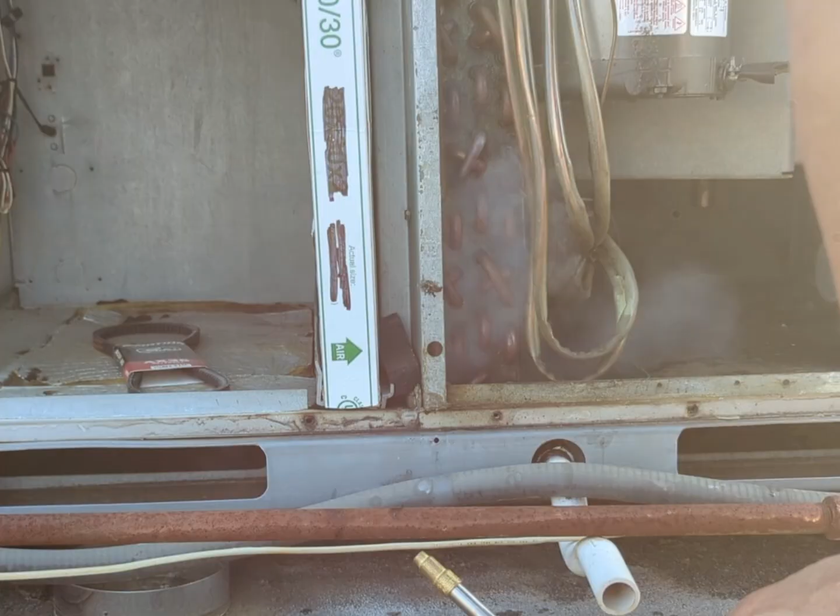Oh, no, no, no. Let's remove this stuff over here. What the heck? Now what? Fire trucks? They're not for me, but what are the odds that they show up while I was brazing and smoke came out?

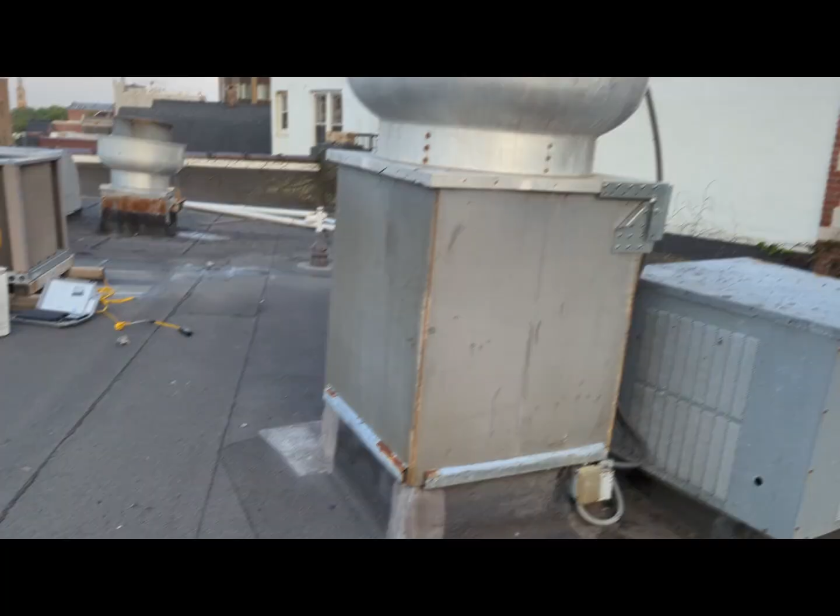Today I will show you how to repair refrigerant leaks for AC systems and refrigeration systems. The first step is to find the leak, recover refrigerant, repair the leak, check if the leak is repaired, evacuate the system, refill the system, and then do a lot of tests. Now, there is no one size that fits all. Every system is different, and there are certain precautions that need to be made for each and every situation.

Oil leaks out with the refrigerant all the time. So when you braze or solder, be prepared for the system to catch fire. I was very prepared. I had water on the side, and the funny part was while I was brazing and the system caught fire, the fire truck came in and I knew it wasn't me. So I just thought it was humorous to add that to the video.

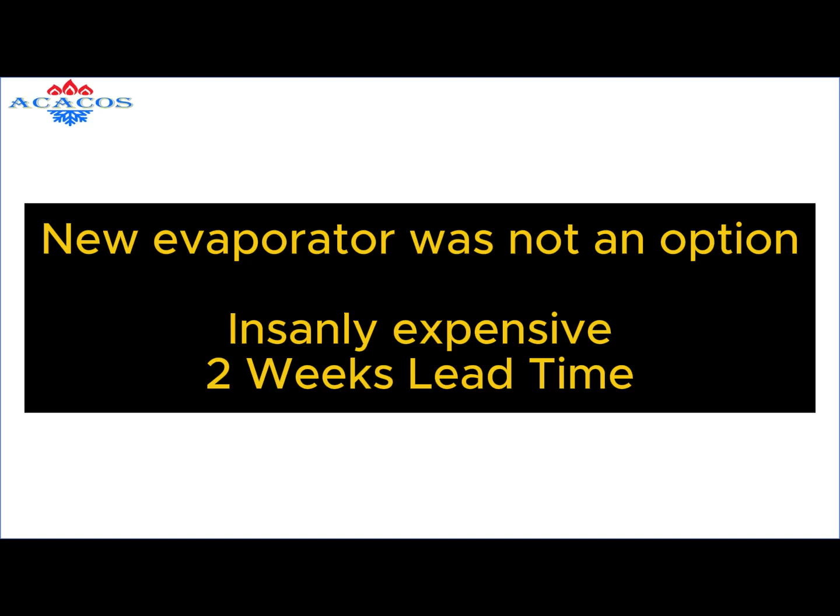The repair took over 5 hours. Yes, you heard that right. It took over 5 hours to fix the refrigerant leak. I had no choice. A brand new evaporator is very expensive, and there is about 2 weeks lead time. So the customer decided to go with the repair. And just for clarification, you need to be EPA Section 608 certified in order to be able to handle refrigerant.

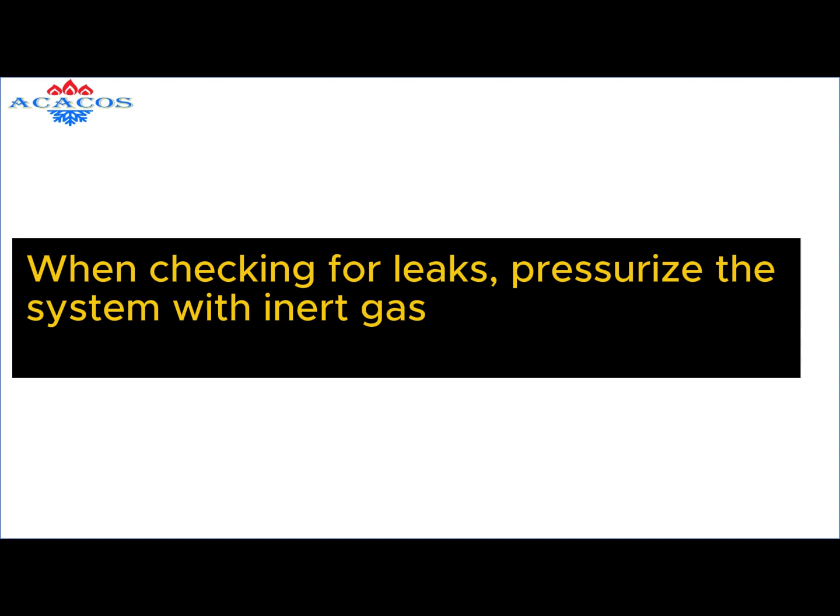Now, this video is tailored in particular to my HVAC students, to bridge the gap between theory, practice, and what we deal with in the real world. I also want to show how to distinguish between nitrogen usages. When brazing, we need to flow nitrogen. That's completely different from when testing for leaks. When we test for leaks, we need to pressurize the system and keep it pressurized for, I would say, about 20 minutes. It depends on the pressure. Each system is different, and those values should be written on the nameplate.

Also, I will show the evacuation procedure. In my case, the system held way below 500 microns for over 20 minutes.

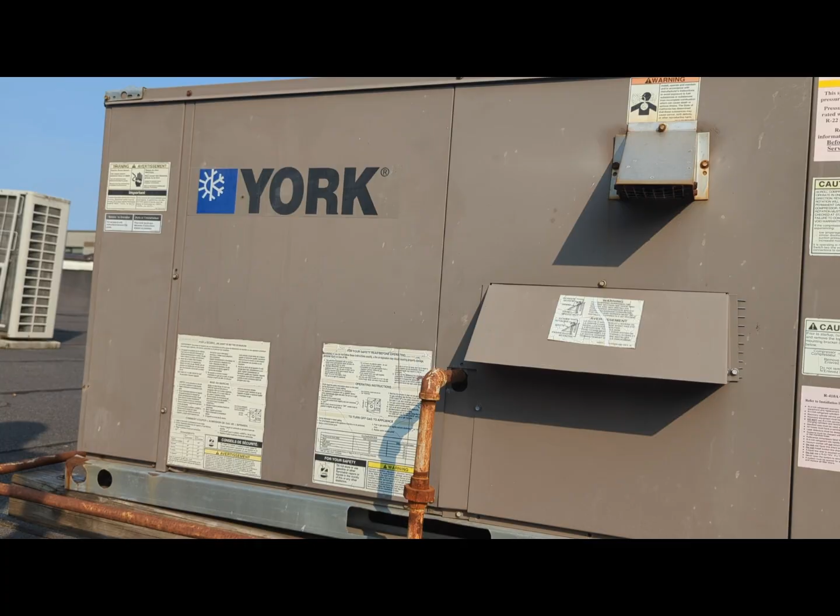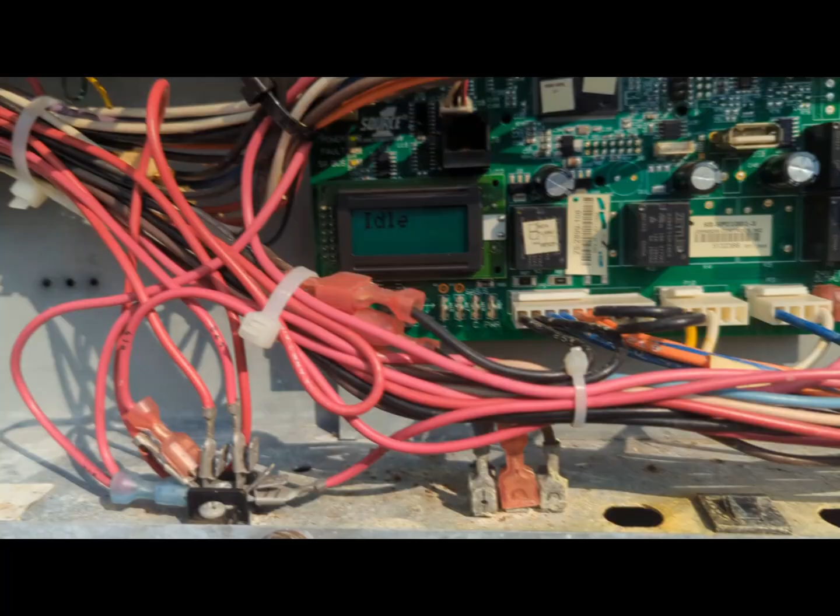This RTU is not cooling. Let's open up and check it out. Let's see if we see any error code. Idle. Okay, locked out due to low pressure. So the error code means either we're low on refrigerant, a bad sensor, or probably a bad PCB. I'm gonna check if the thermostat is calling. Okay, 26 volts. Yeah, we have a call.

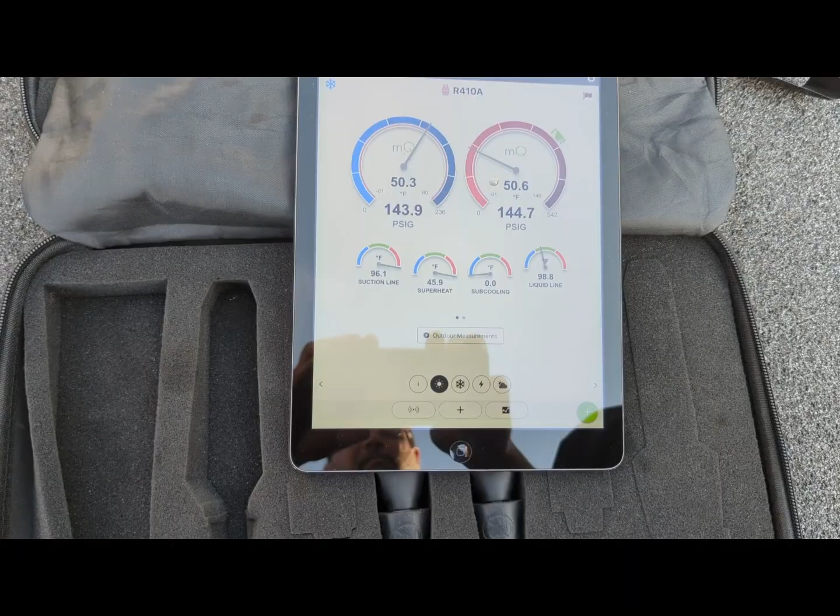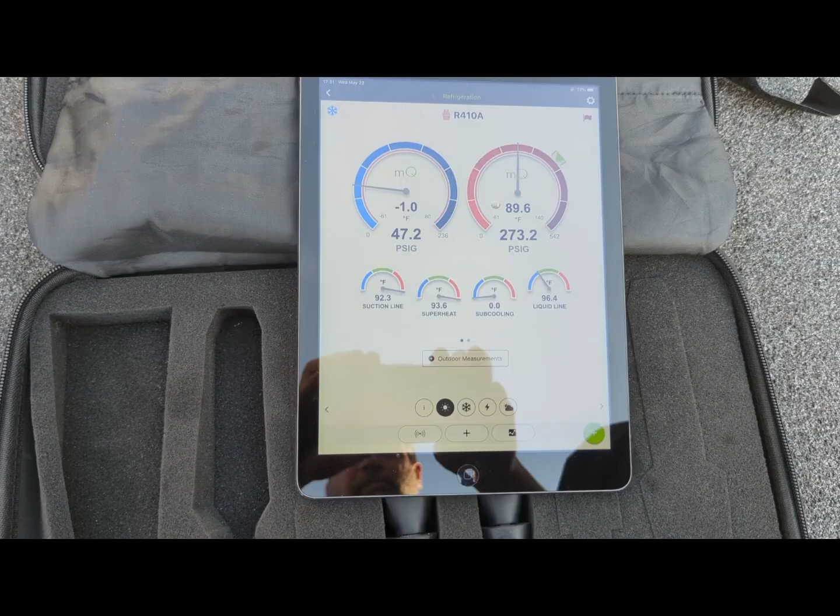I gauged up. We started the system. Compressor started. Looks like we're going down on pressure. Seems like the pressure is low. Probably have a leak. Oh wow, 47 psi for 410A. We're very low on charge, very low. We definitely have a leak. Let's shut the power off.

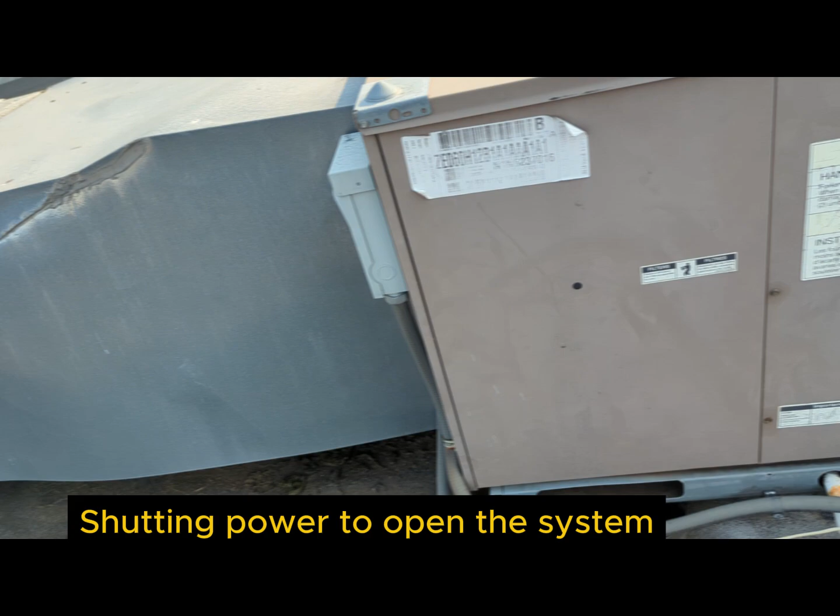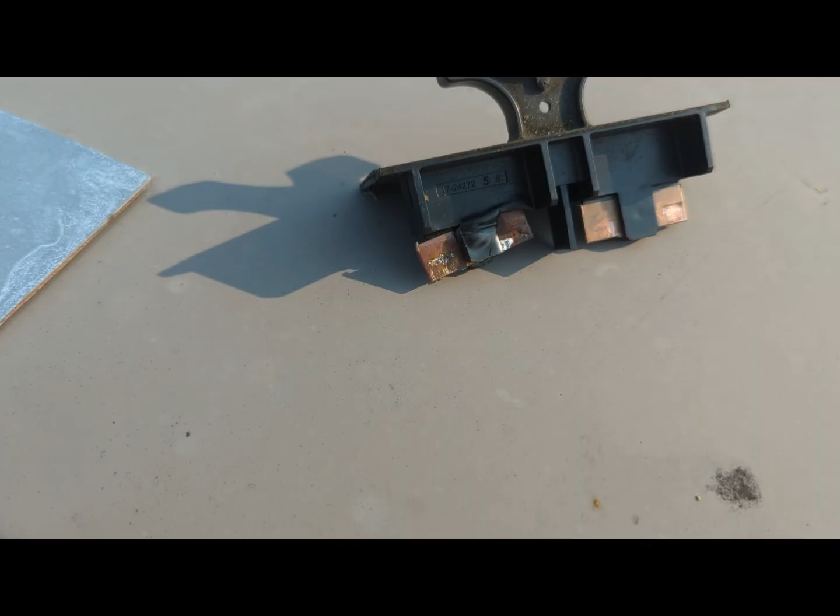This disconnect is missing the cover plate. What's that? This disconnect is severely damaged. We have to replace it. I gotta tell the customer about it. It overheated. It's no good. Time for Mission Impossible. Gotta find the leak. Alright, let me open up this side here. That's gonna be a hassle. Alright.

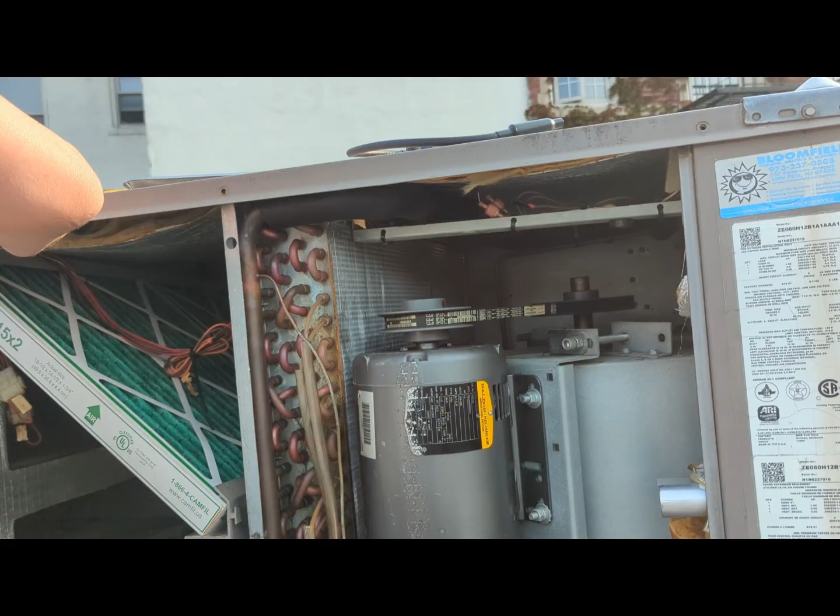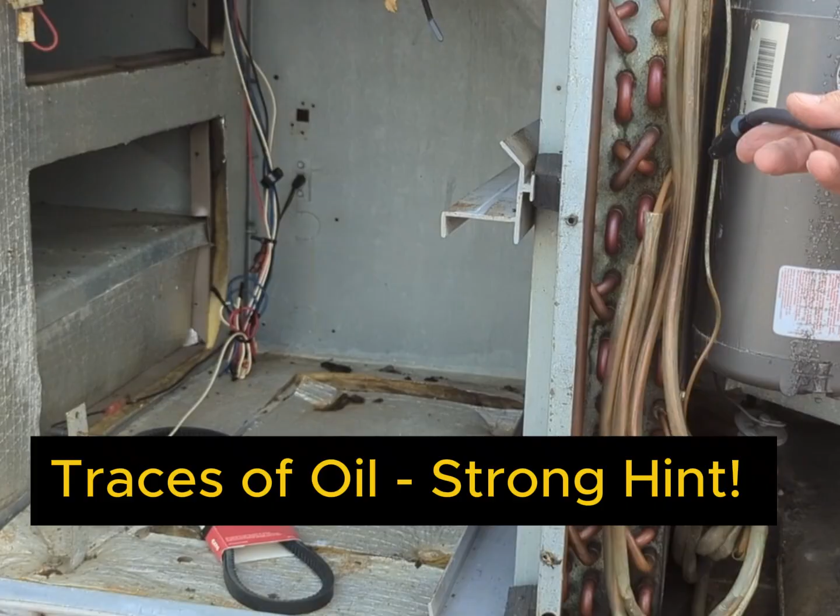Now I'm here, I'm gonna check the filters. I'm gonna check the belt, as much as I could see. Feels tight. So I noticed traces of oil. I pulled my leak detector. I'm using the Inficon D-TEK 3. Good for me. I found leaks with it. Traces of oil all over the place. Traces of oil are almost in the middle of the U-bends.

Usually I start from the top because refrigerant is heavier than air, so it settles on the bottom. So let me find the general area and then I will pinpoint. There we go. I found you. There we go. Second hit. Same spot. And now we're all over the place. That's gonna be frustrating.

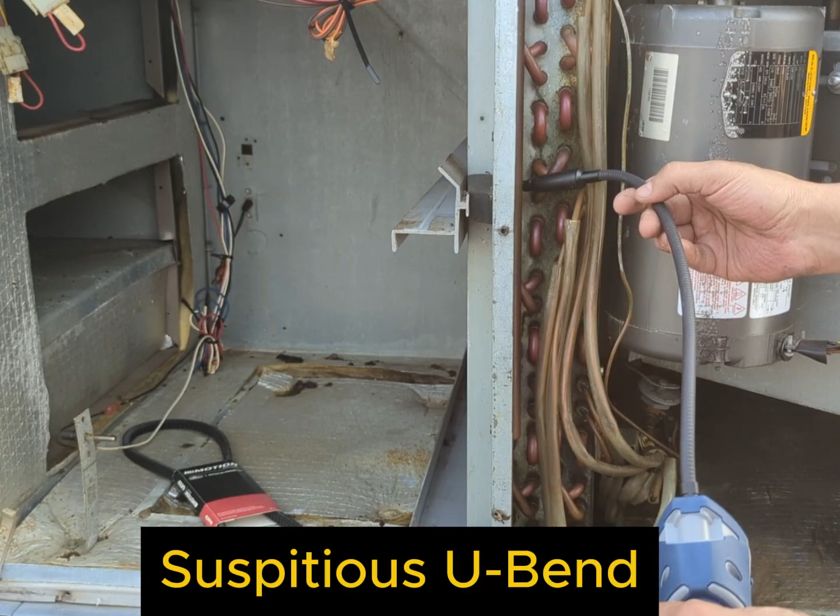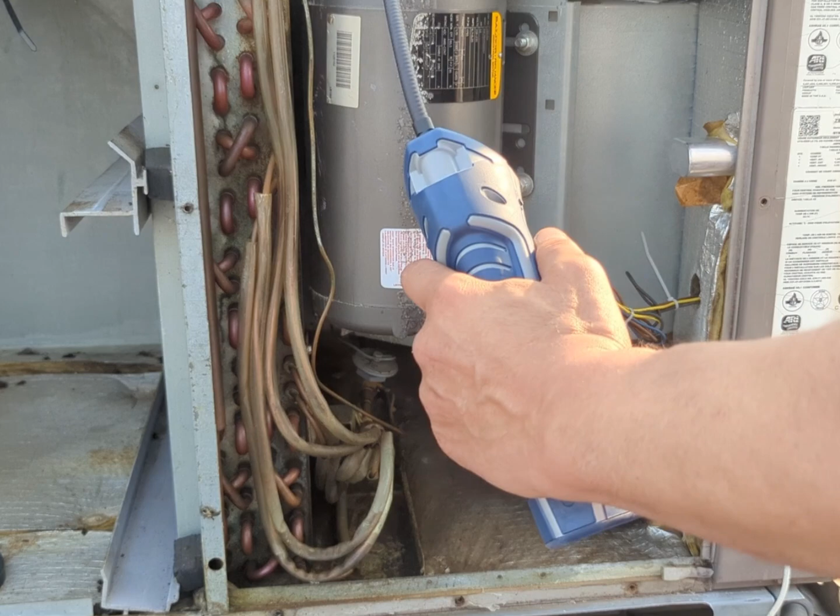I know it's here. I'm restarting from the top, going all the way down, but I think it's somewhere in the middle. That U-bend looks suspicious, very suspicious. I hope the leak is not behind the fins. Just hoping. Now, why on earth am I getting a hit on the top? Why? I don't see oil. I think I'm gonna bubble up. Soap and water is the solution. That's it.

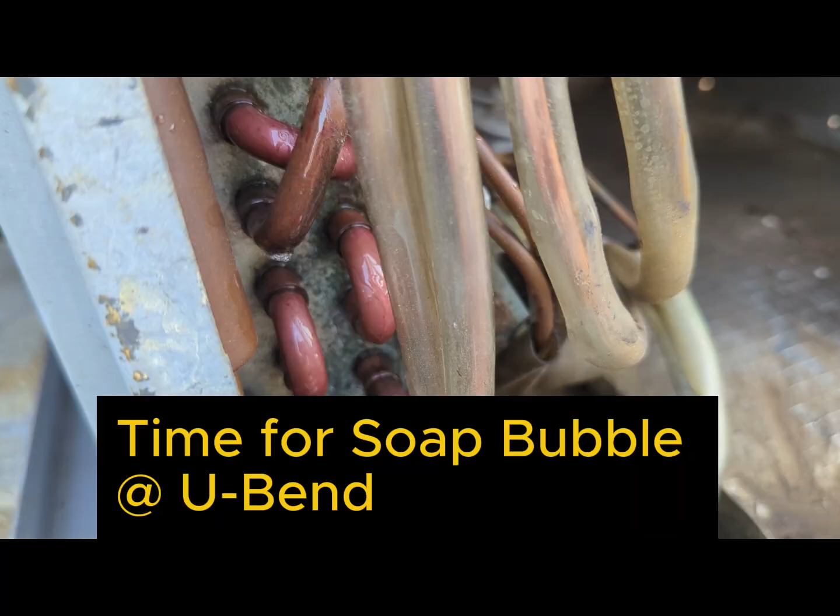Okay, the system started with about 150 psi. Good enough to soap bubble and find leaks. Low tech, but it works. It really works. It's literally the confirmation. The detectors lie. Soap bubbles never. This is a critical step. You gotta wait. You have to be patient. You need to see the bubbles growing. Very important. Very, very important.

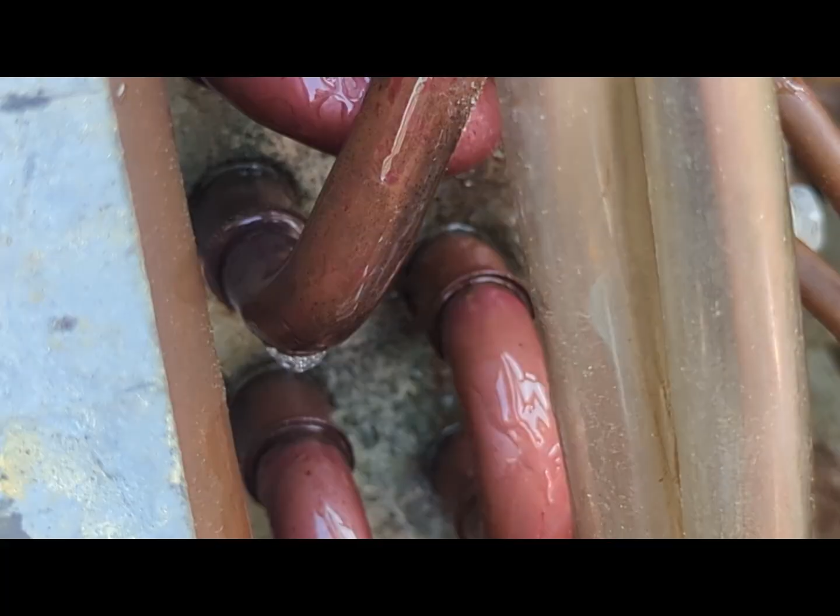What the hell? I think I see something. I saw it. That's it. That's it.

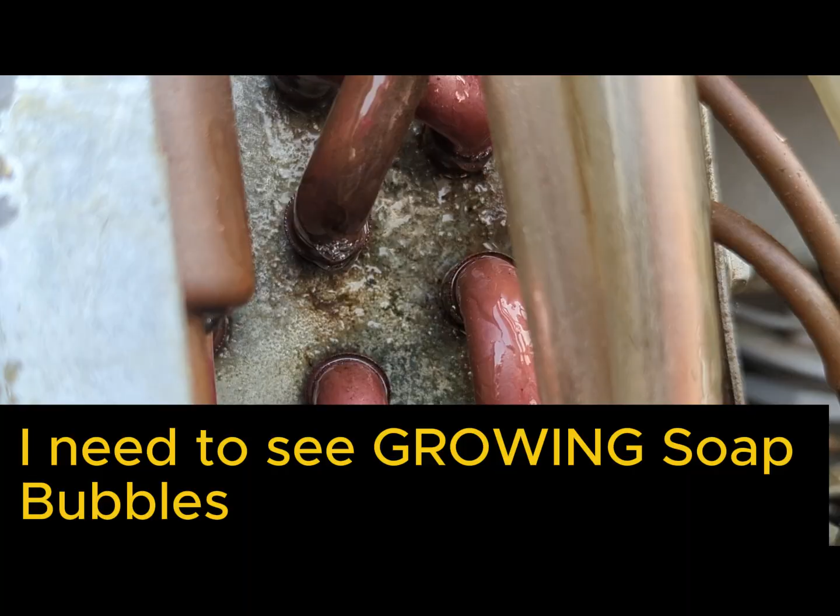Second time here. There we go. There we go. Guaranteed now. Trying to zoom in. Pay attention. Bubbles are growing. Not bubbles, they're bubbles that are growing. Important. Awesome view. Awesome footage.

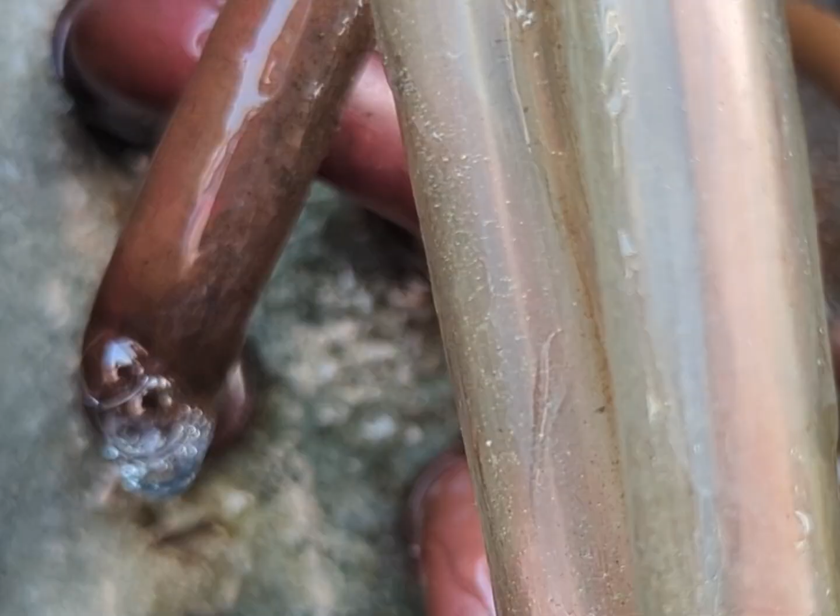Now that we found the leak, there are some other steps. First, we need to recover the refrigerant. In order to do that, I need to prepare the recovery tank and recover the refrigerant. Then flow nitrogen from one side of the system to the other side, because I'm brazing, not soldering.

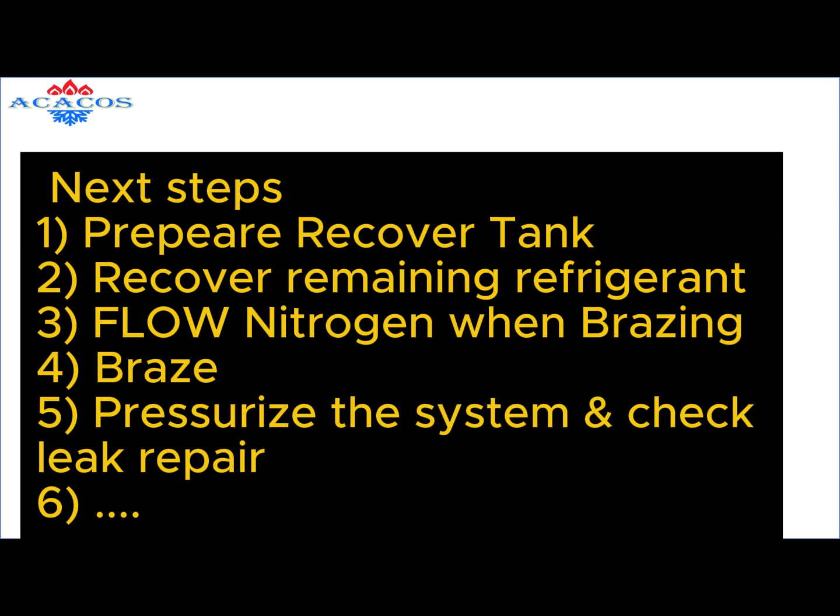Then braze the system, and after that, we have to repressurize the system in order to check if the system has been properly sealed or not. If the system is properly sealed, then after that we have to evacuate the system, and then we could refill the system with refrigerant. Okay, as you could see, I'm preparing the recovery tank. That looks like 300 microns. I'm good.

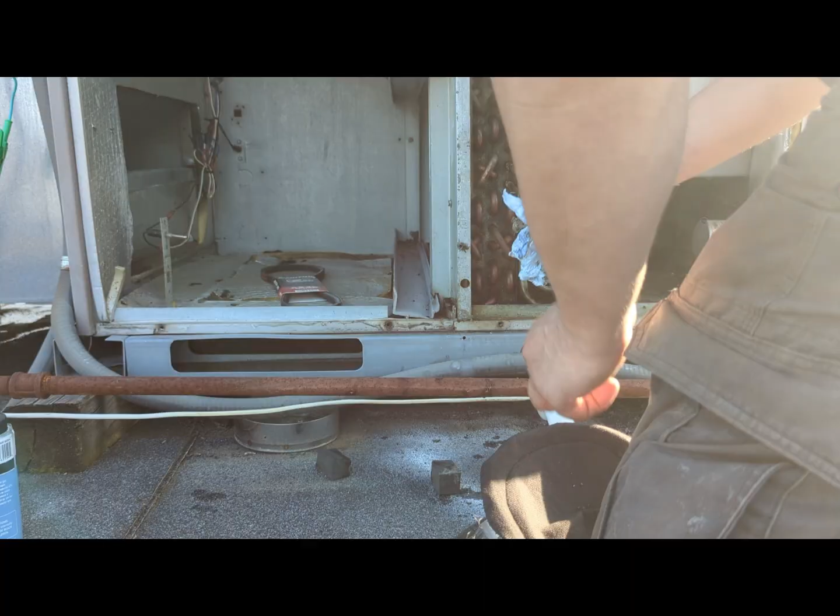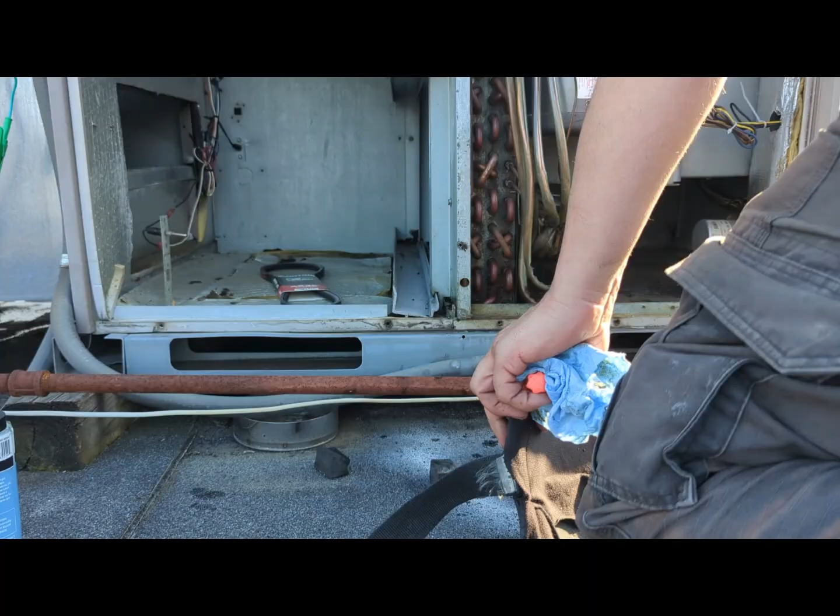Not wasting my time. There is a lot of oil. When I started brazing, it caught fire. First time, second time. So I decided to clean the system a little bit. Probably doing way too much, but it is what it is.

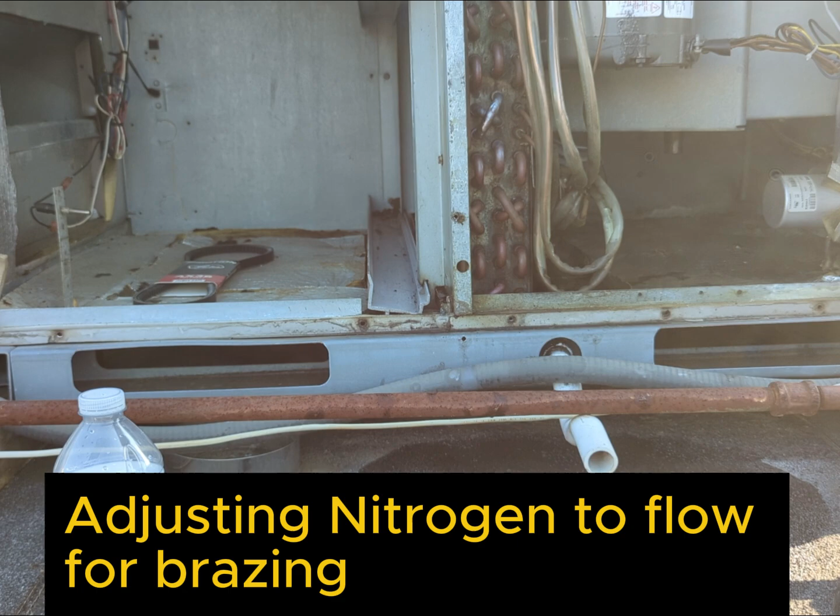I'm adjusting the nitrogen pressure. I set it on the brazing mode, so it's very low pressure. I think it's between 3 to 5 psi. Now, if you want to buy a flow meter, that's your decision. It's probably highly recommended to buy a flow meter and to work with that.

Okay, I'm using acetylene only. You could use oxyacetylene. Really depends what you're doing. You could use MAP gas. Okay, I have to focus when I braze, so I might be a little bit quiet for a few minutes. Notice I'm using a bottle of water, just in case. Now when I braze, I have to focus, so I have to be quiet for a few minutes.

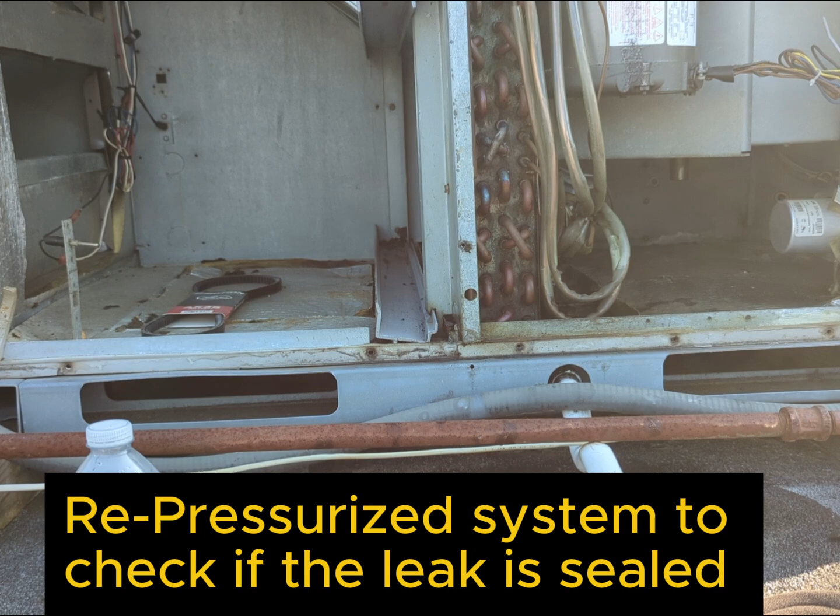Okay, I don't care about the look of the braze. I just want to make sure that there is no leak. It looks like it needs a little bit more over here. Let's see if that works. So the nameplate calls for about 200 psi. So I pressurized the system to 200 psi. Not flowing nitrogen. I pressurized the system with nitrogen to 200 psi. Now I'm looking for leak. Double checking.

I want to be specific. I put nitrogen with some traces of R-410A to make sure that the leak detector could detect it. Alright, I changed the settings to sensitive mode. That takes a while every time. It's not trivial.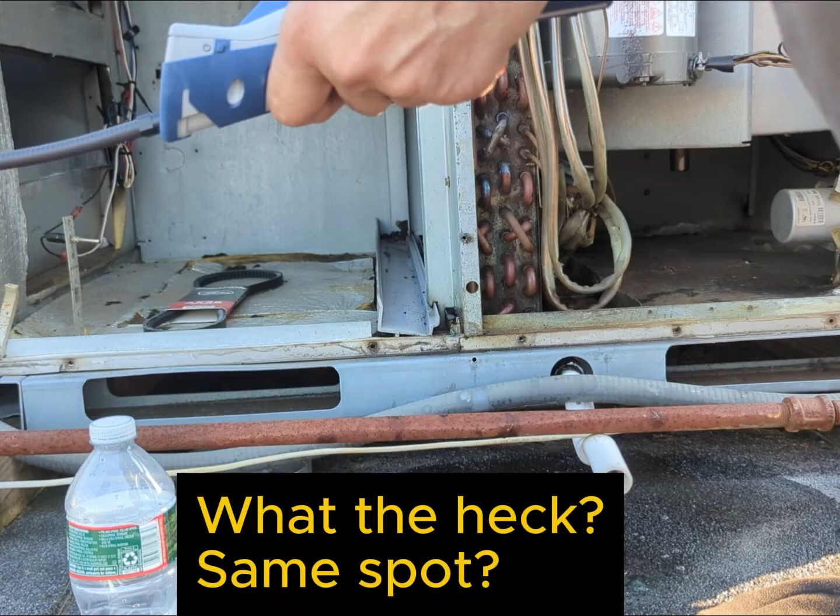No way. Did I miss? What the? I mean, you've got to be kidding me. Again? Same spot? I think I have to soap bubble it again. Hold on. I put it at 200 psi. I'm confused. I'm frustrated. I'm at a loss here. Yep, guessed right. Gonna sit down and make myself comfortable. I need to find the leak.

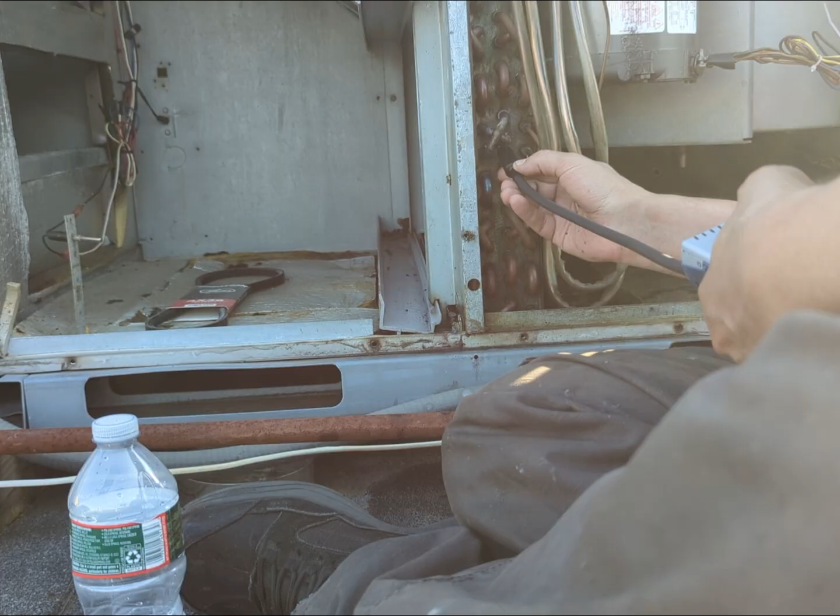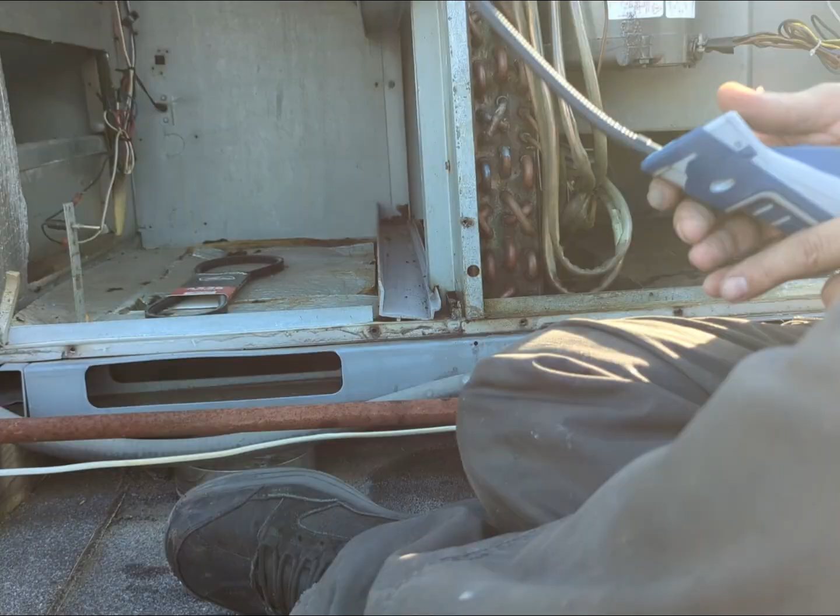Huh. Same spot. You got to be kidding me. Maybe it's in the fins. Nope. It looks it's right here. Is it in the coils? I don't want to take out those fins. Let me check. I mean, at this point, I'm beyond pissed. It doesn't look like it. I think it's the U-bend again.

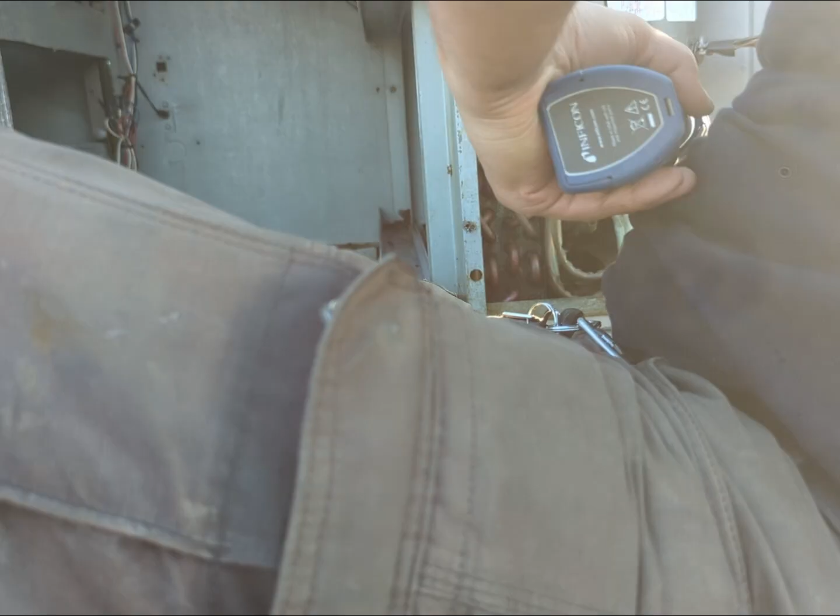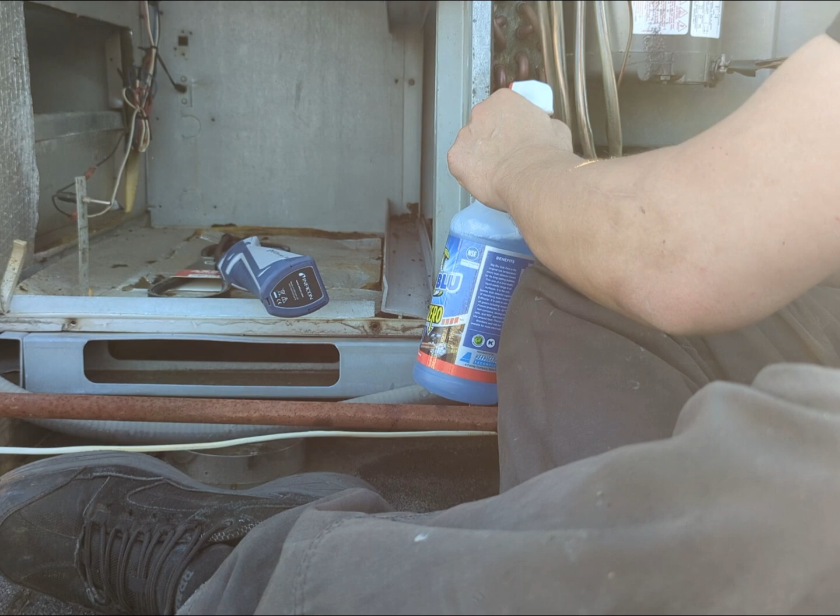It's the U-bend. Did I miss? Some soap bubbles again. Now I gotta wait. What, 5-10 minutes again? This is beyond frustrating. Thank God. Have patience.

I see something. Hold on. Think I got it. It's a different one. Let me try to zoom into that one. I see it. Here we go. It's right at the interface. Oh my God. How am I supposed to braze that one? Alright. Let me try to give you a better view. Just gonna give it a shot. Let me zoom in. I see it. It's right there. It's a volcano.

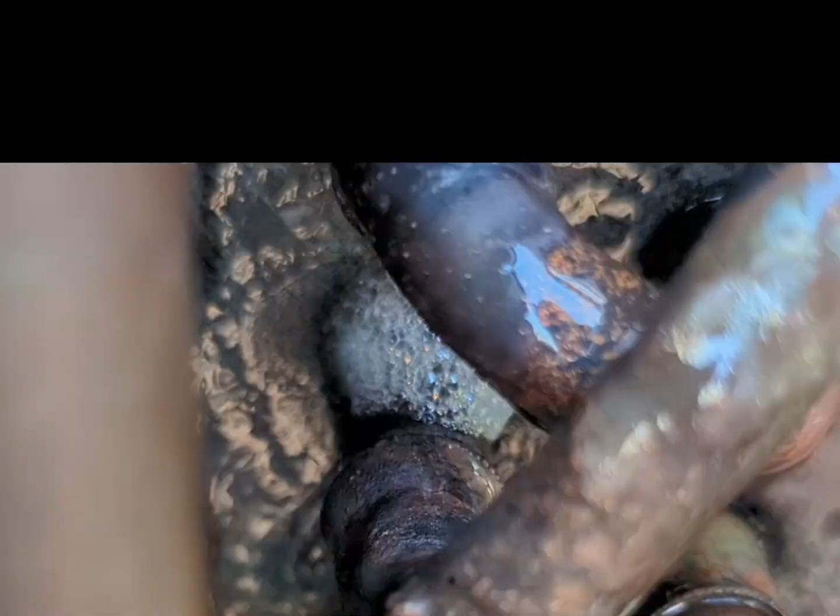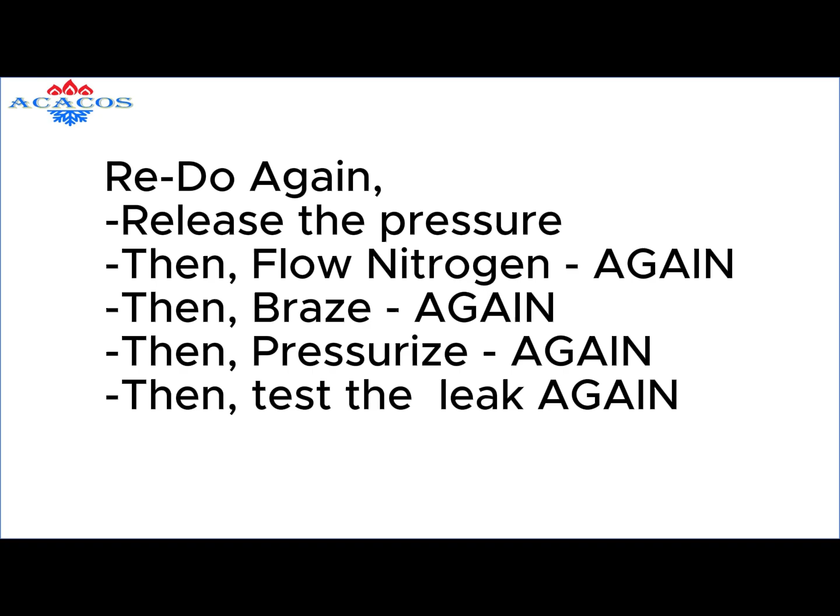As shown in the footage, I have to redo a lot of steps. Again, release pressure, flow nitrogen, braze, pressurize the system, and test for leak again. Just to give you heads up, I'm flowing nitrogen.

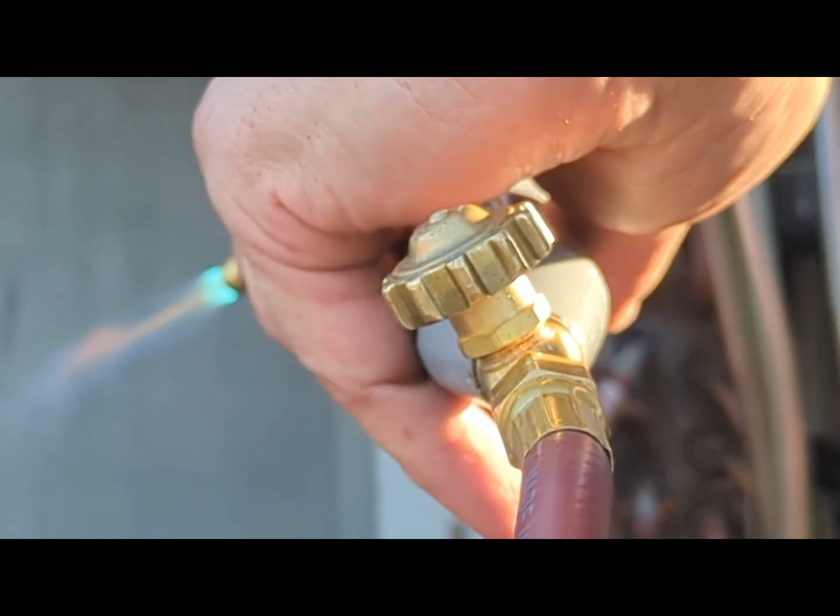I gotta find the right angle and right position in order to be able to braze. That's a difficult one. So the molten Sil-Fos has to melt and flow nicely. I'm hoping I don't have to cut the galvanized plate. It's gonna be a disaster if I do so. I've done it before, but I don't want to do it again. I'm gonna try to do it in one shot. If it doesn't work, it's gonna be very tough.

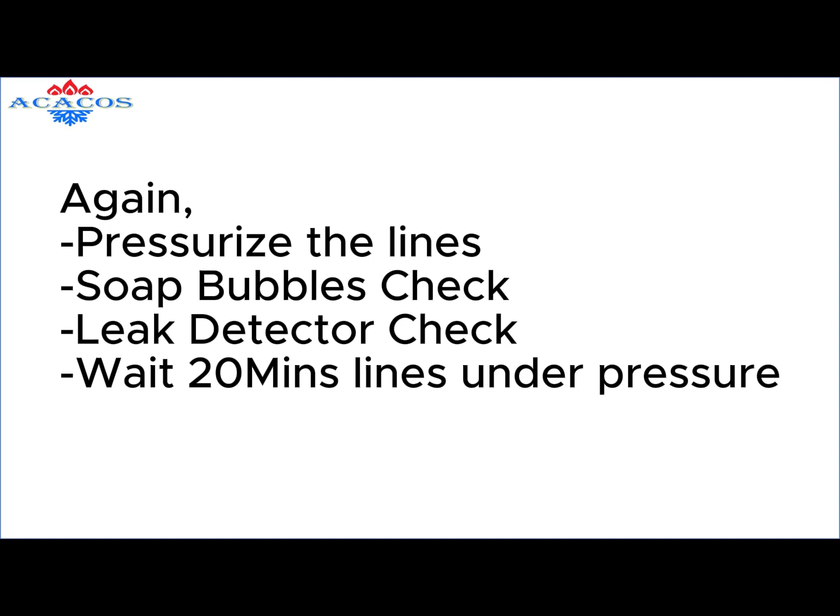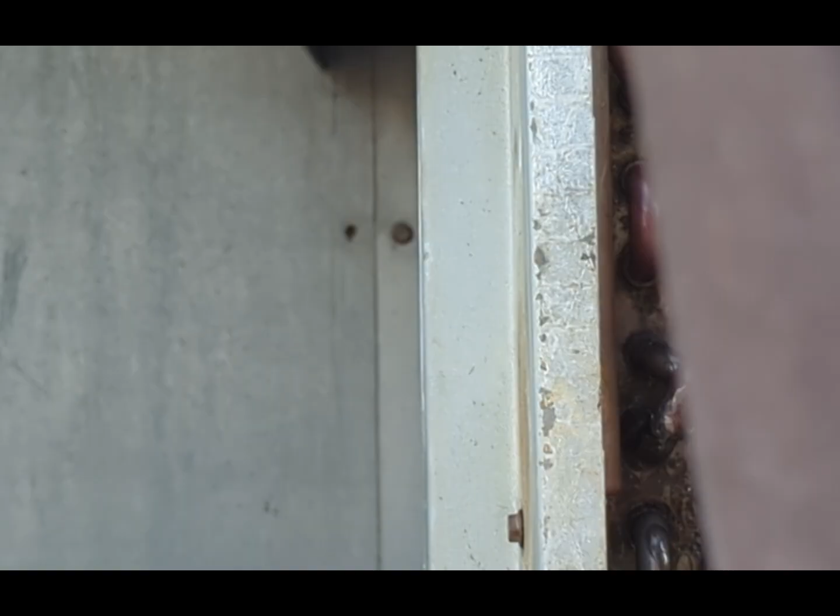Now I'm gonna pressurize the system to about 200 psi, and then check with the leak detector and the soap bubble, and I'm gonna run a pressure test for about 20 minutes. Sometimes I do less, it depends. So I pressurize the system to about 200 psi. I'm using soap bubble first because I know the area, so I want to make sure that that area is fixed, and I will worry about the other spots if there are any.

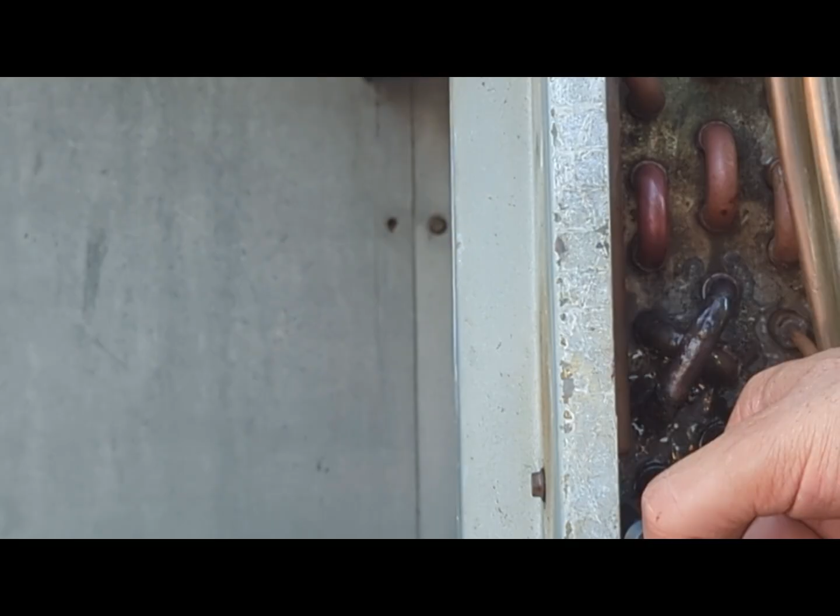Many times we had systems with multiple leaks. I remember once we fixed a coil that had 7 leaks. The customer couldn't wait. The lead time was 2 or 3 months to even get an evaporator. It was a walk-in cooler, so I couldn't wait. Customer cannot wait. Multiple times we had to fix coils that had multiple leaks. I mean, you have to deal with the problems. We are in the business of fixing problems. That's what we do. Troubleshooting and repair.

I think we sealed the leak. And when I check the pressure test, let me see. What's that? That's about 10 minutes. The pressure hasn't changed. Let me zoom in. Passed. So let me summarize this. The pressure started at 197 and it ended at 195.

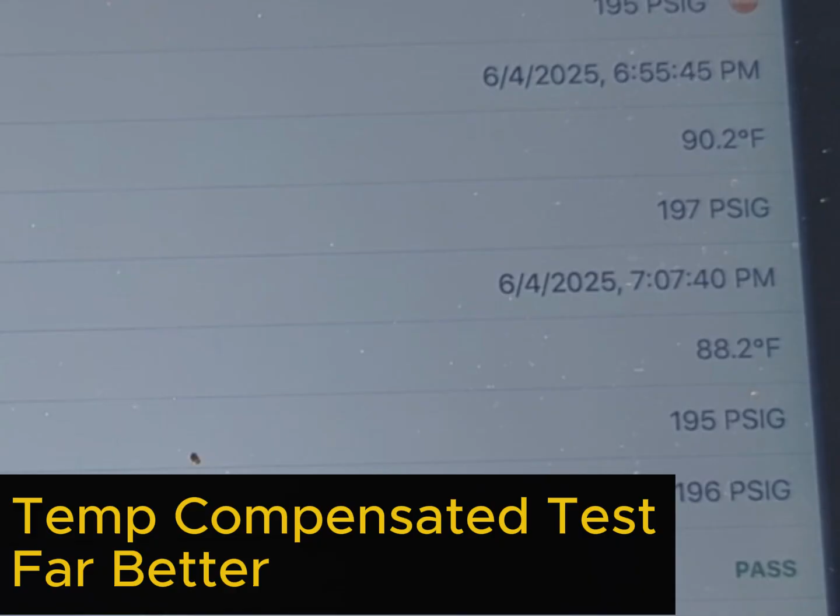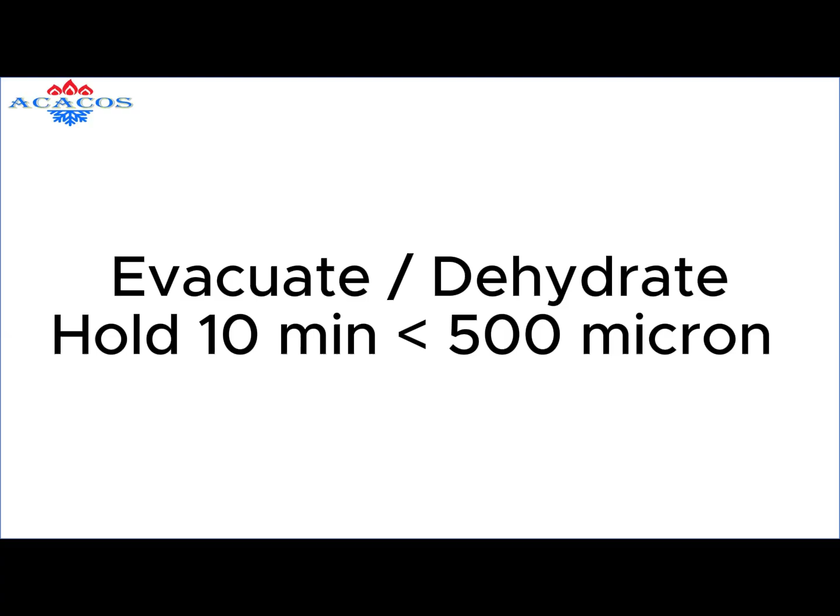It's a temperature compensated test and the software does the calculation. So as you could see, it passed. It passed within 12 minutes. If I did not have a temperature compensated test, I would wait for about 20 minutes, sometimes even longer. But in this case, it passed. And then I will run the evacuation procedure. And if the evacuation procedure passes, then I would be very comfortable that I fixed the leak. All right, now I'm starting the evacuation procedure.

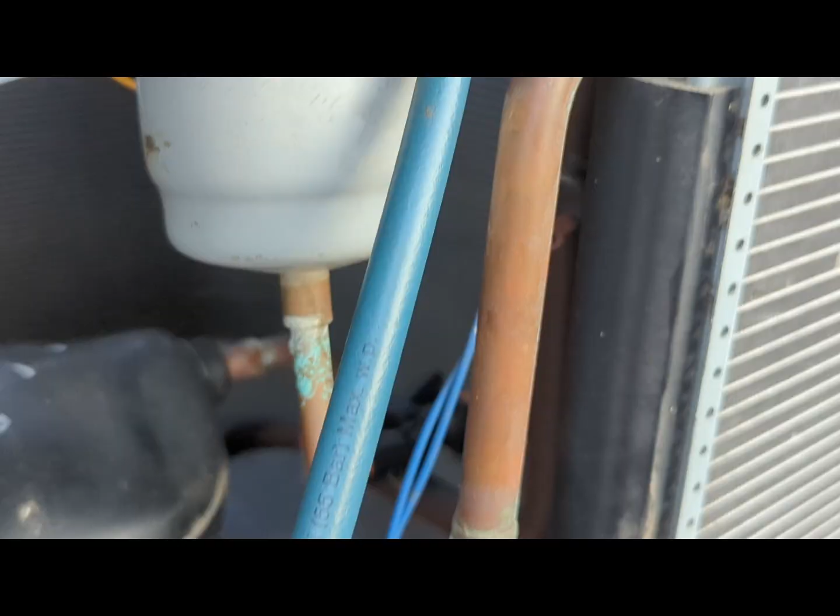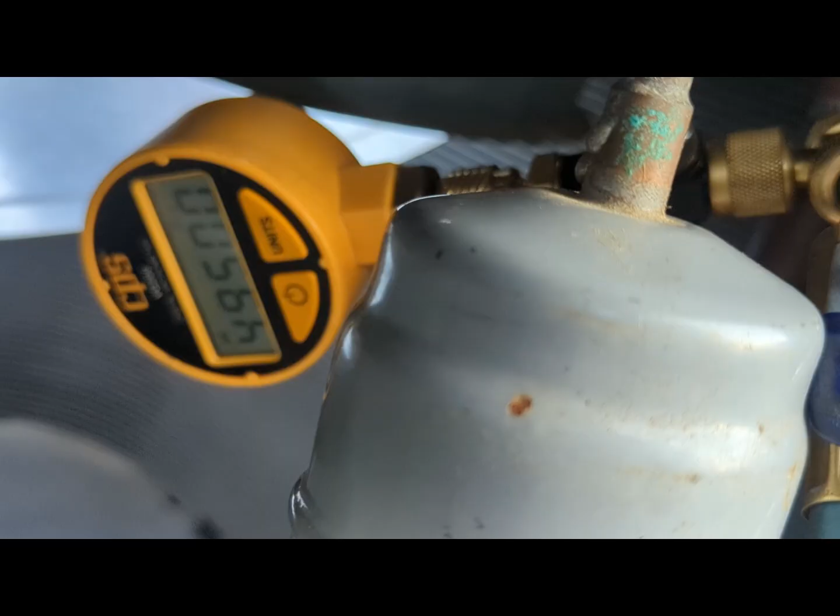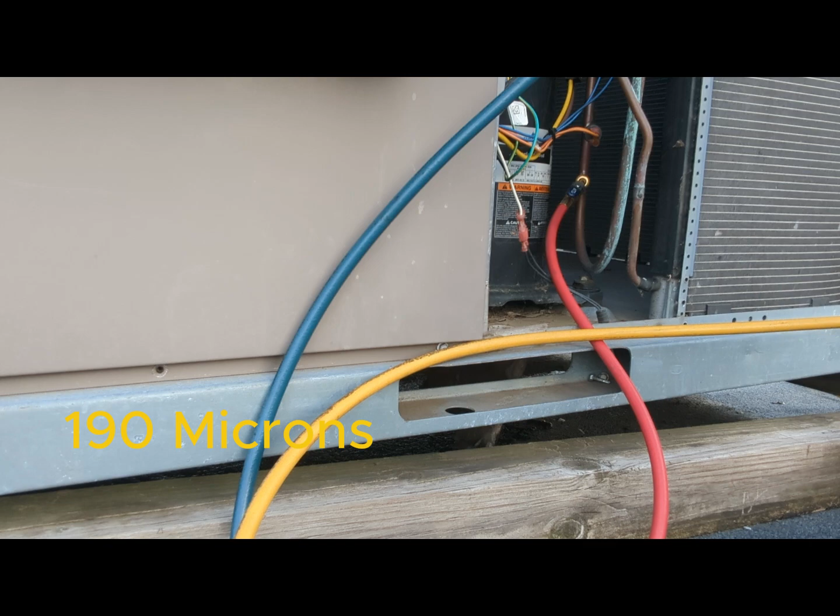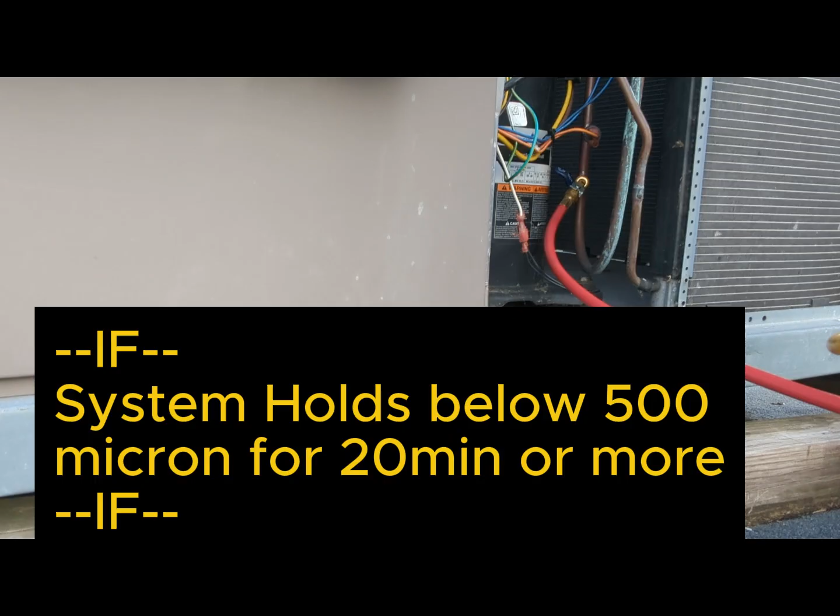All right, let me see. 51,000. It's coming down fast. That's 190 microns. Excellent, excellent. I'm gonna close the gauges, shut the pump. If the system holds at 190, even slightly more, probably 250, for about 20 minutes, we should be safe.

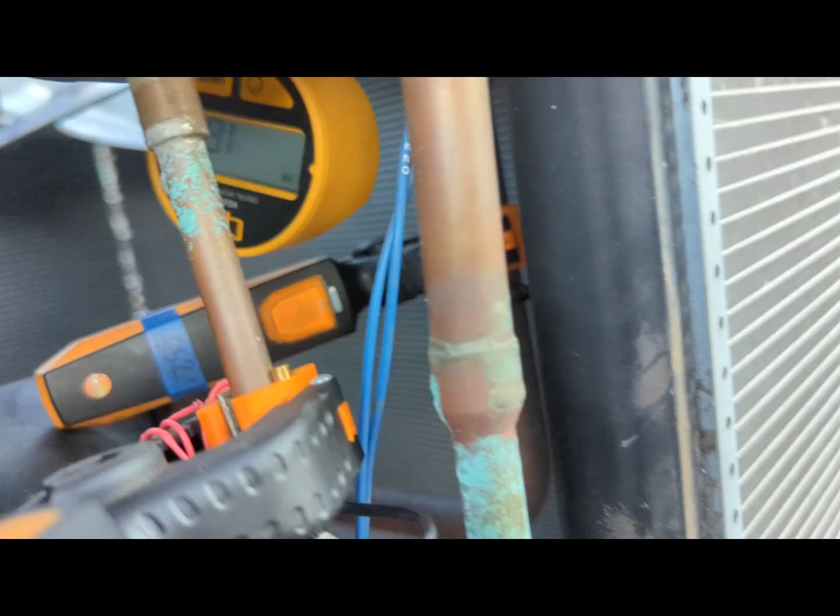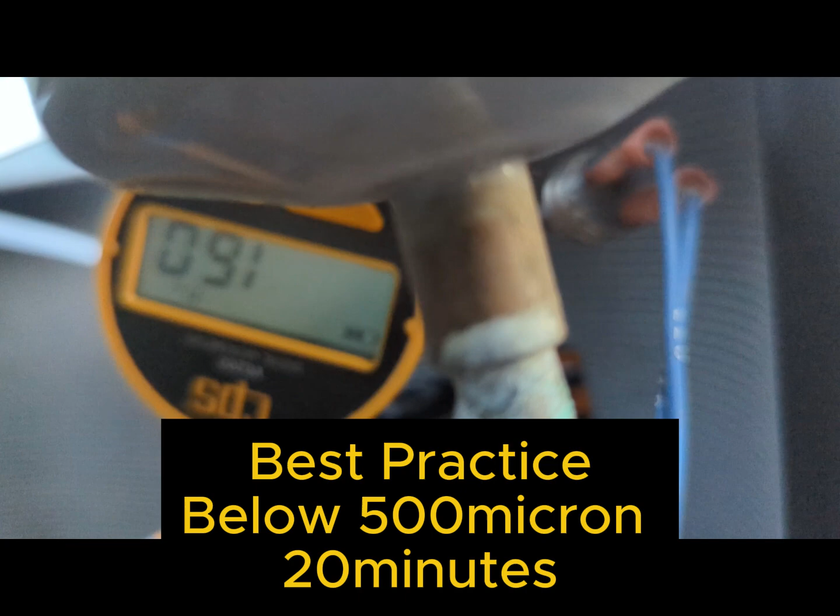Got distracted with the phone call. Let me see where we're at. What's that? 160. Perfect. So the industry recommends to hold 500 micron or below for 20 minutes. I was able to bring the system down to 160 micron, and I was able to hold 160 micron for over 25 minutes. We'll use that as another confirmation that we have no leak in the system.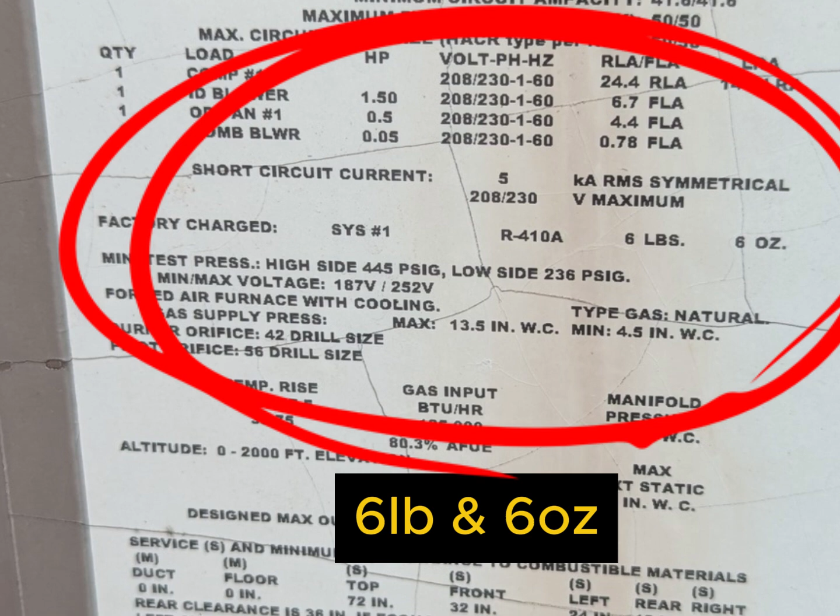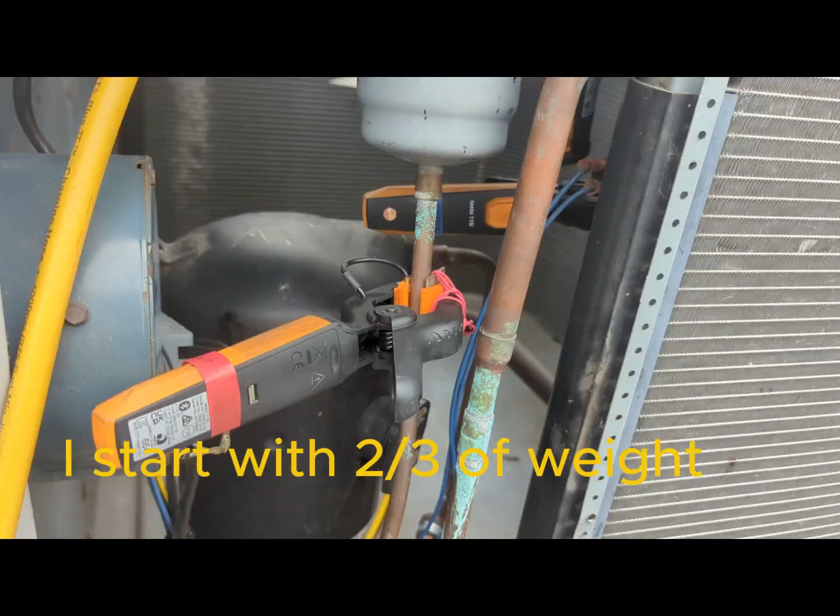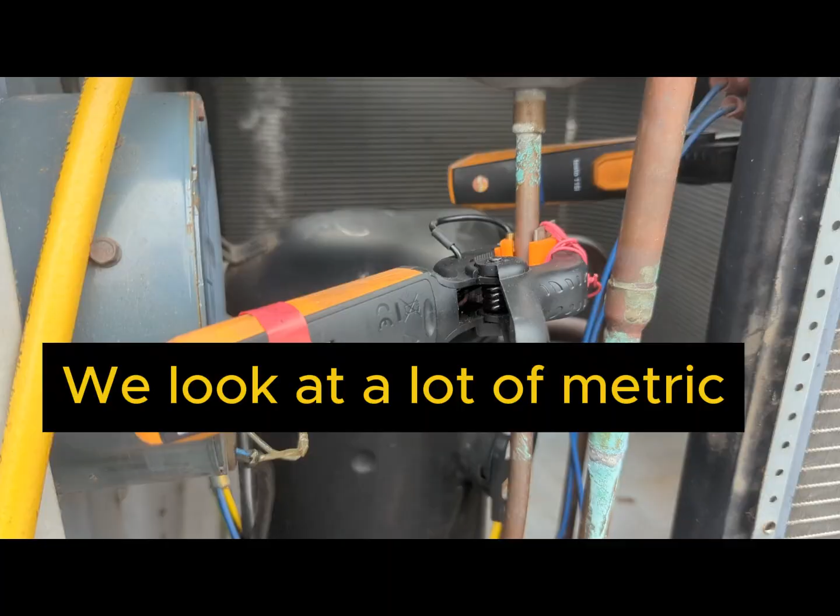Refilling the system with refrigerant. So the system takes about 6 pounds and 6 ounces. I put about 4 pounds and then I started the system in order to be able to have the suction line bring in more refrigerant. And then I'm gonna meter the remaining, meter or throttle, whatever you wanna call it, the remaining refrigerant up until I get to certain metrics that I'm looking for. Alright, my superheat looks too high, so I'm still metering in until I get to what I need.

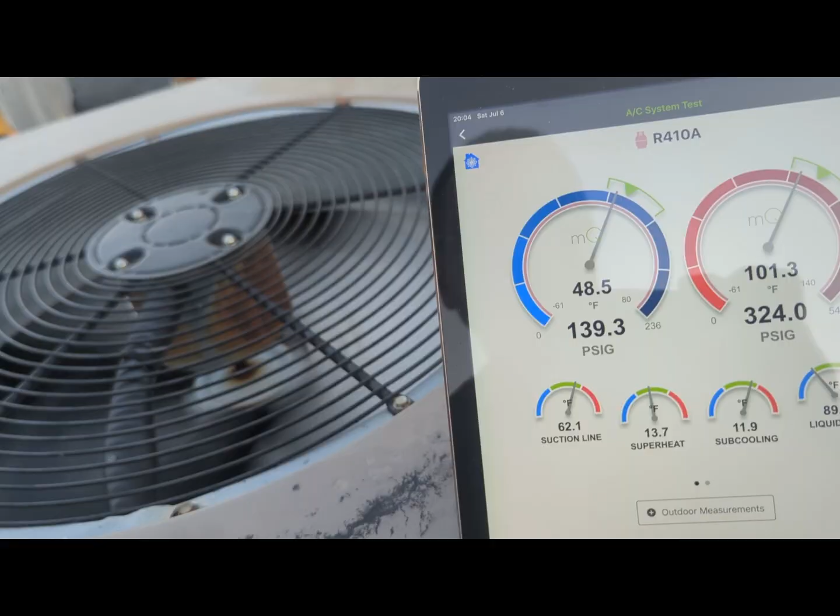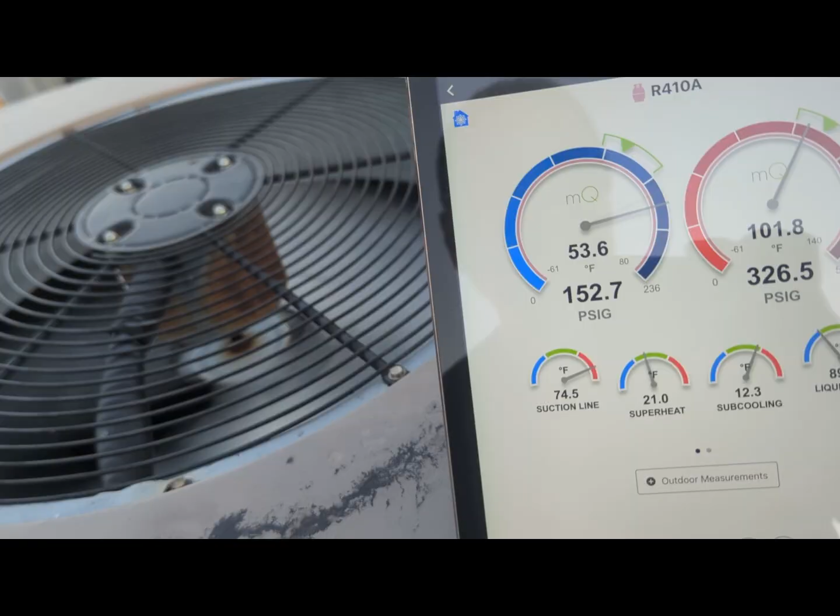So my subcooling might not be the most accurate one. There is no liquid port, so I'm using the discharge port to measure the subcooling. Now that gives me a clue. At least I know it's not zero, but it's not the correct definition of subcooling. The metrics look much better now, but still not good enough. I have to throttle a little bit at a time and then wait. It's a waiting game. You have to have a lot of patience in this industry. A lot of things could go wrong.

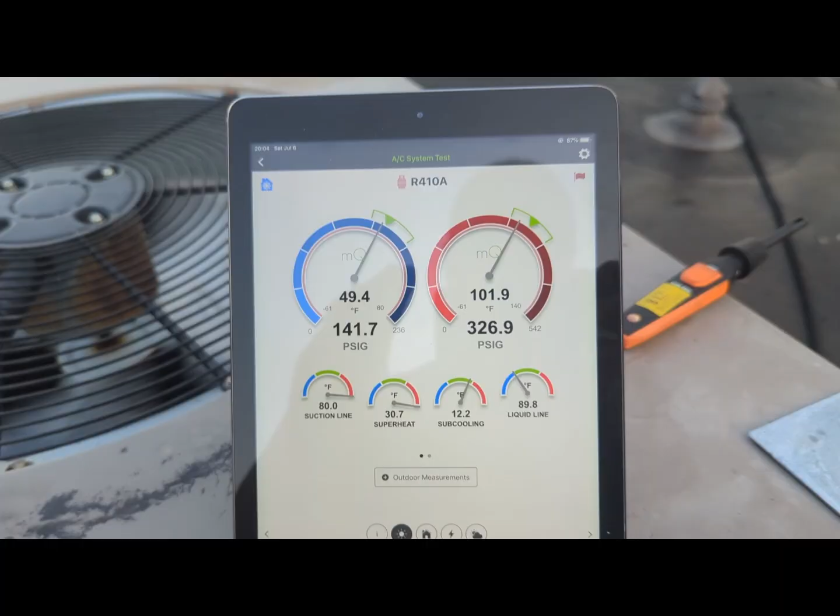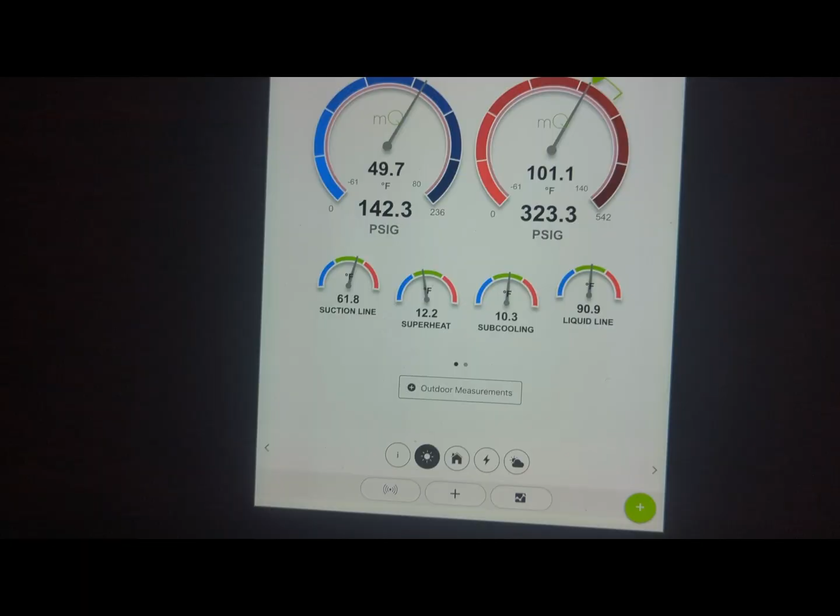Okay, it's much better now. It's getting dark. I need to start packing. It got dark. Finally, I got some help to help me pack. The system had enough time to stabilize. Values look so good.

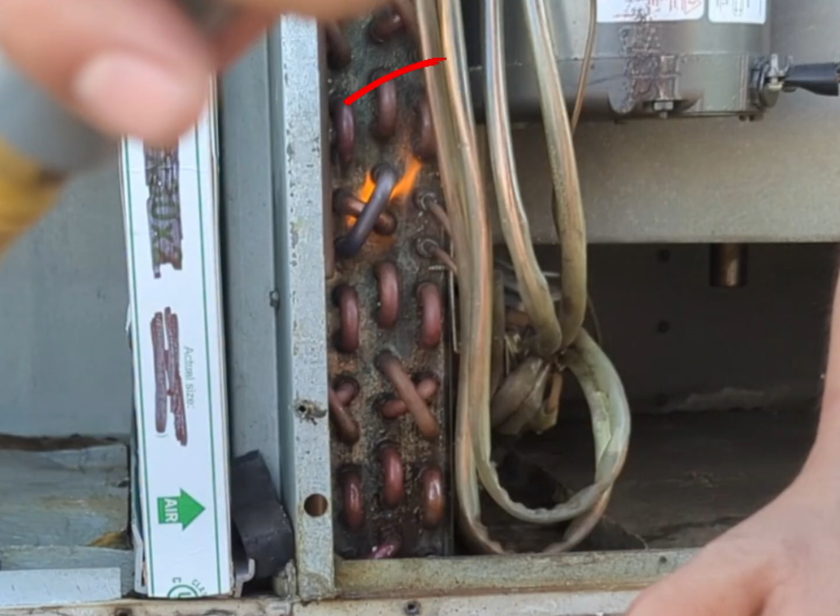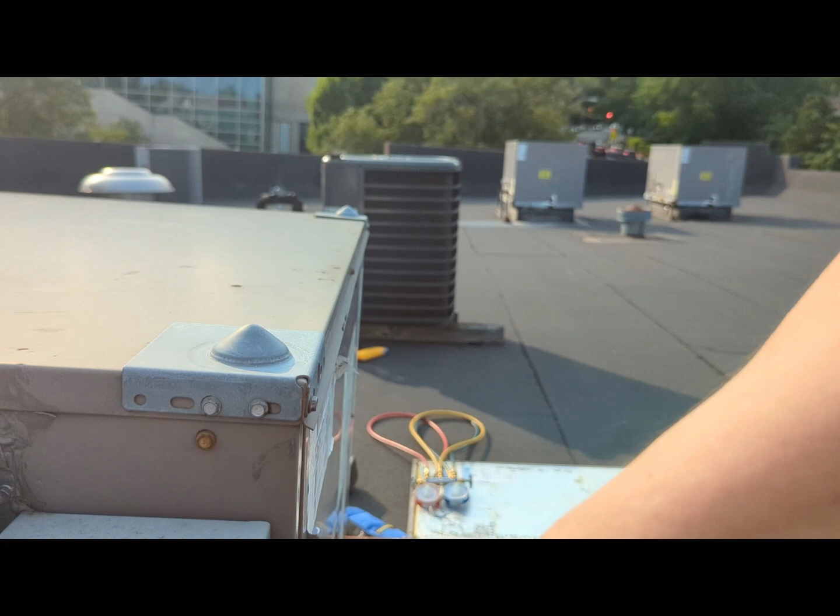In this video, I showed how to find a refrigerant leak in an AC system. Oil is a byproduct of refrigerant leak, so caution must be taken when you braze. That oil might catch fire. I selected this footage because the oil caught fire while I was brazing, and I thought that's priceless footage to show. Now, I was lucky and I was prepared because I was brazing on a roof. A roof is not a confined space like an attic or a basement, which are sometimes slightly more challenging environments to braze in.